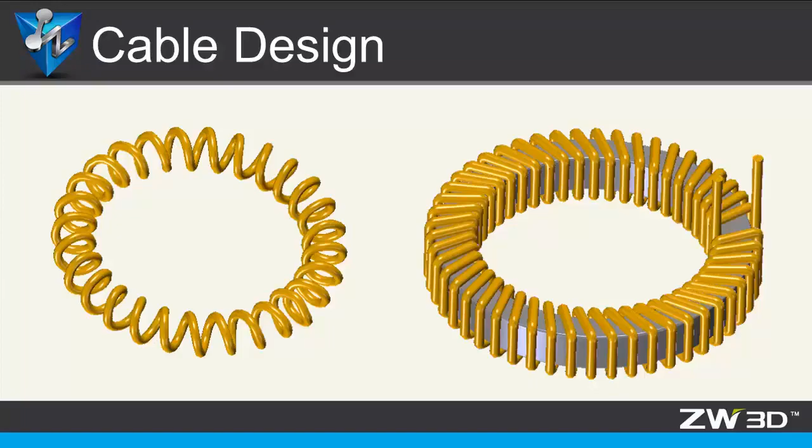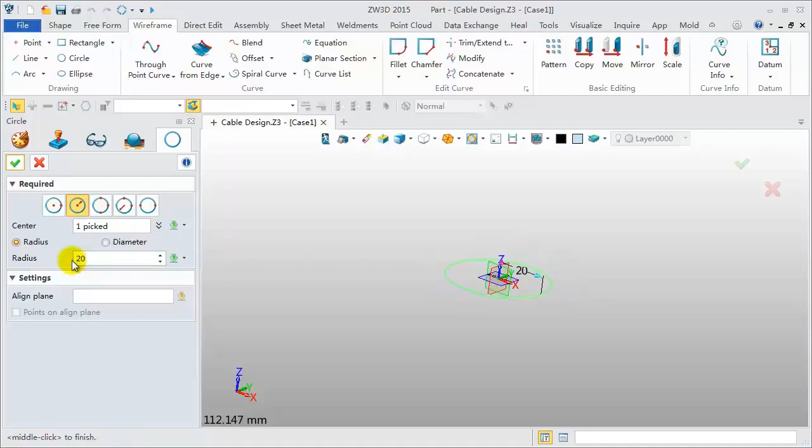Now, let's begin. Create a new file and name it Cable Design. Click the plus icon to create a new object. Name it Case 1. Click Wireframe, Circle. Pick the original point and set the radius to 20 millimeters. Click OK to finish.

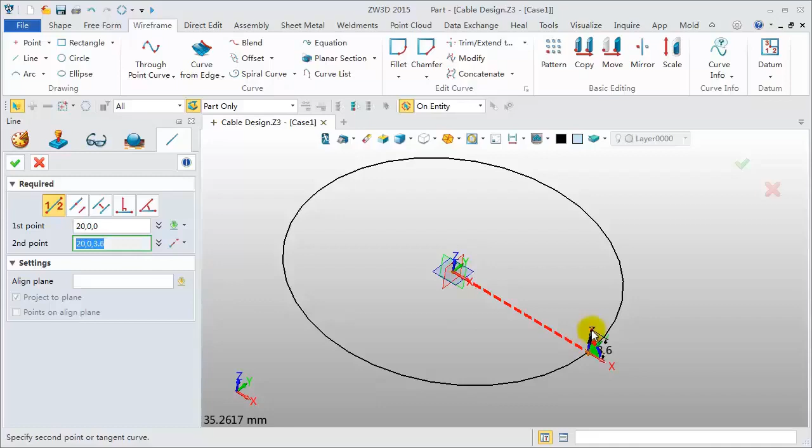Next, create a line. Hovering over the original point, move the mouse along the x-axis to the intersection. Continue to pick the second point. Distance is 3.6 millimeters.

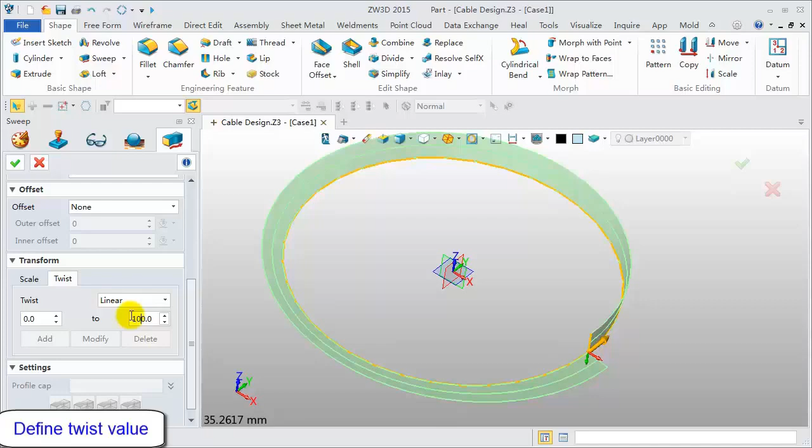Click the Sweep feature. Pick the line and the circle separately. Define the twist parameters. Linear change from 0 degrees to 10,000 degrees. This is the sweep result. Next, use Wireframe tool to extract the curve from the edge. Blank the sweep surface.

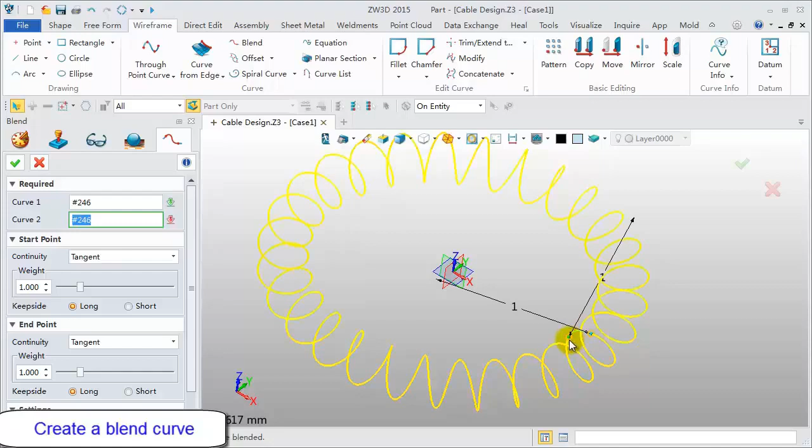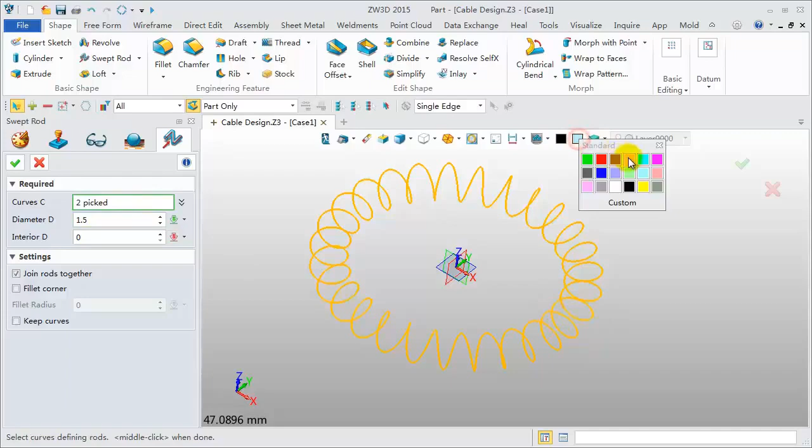Next, click Blend command to create a smooth connecting curve between the endpoints. Last, use Swept Rod feature to create shape. Pick curves. Diameter value is 1.5. Click OK to finish.

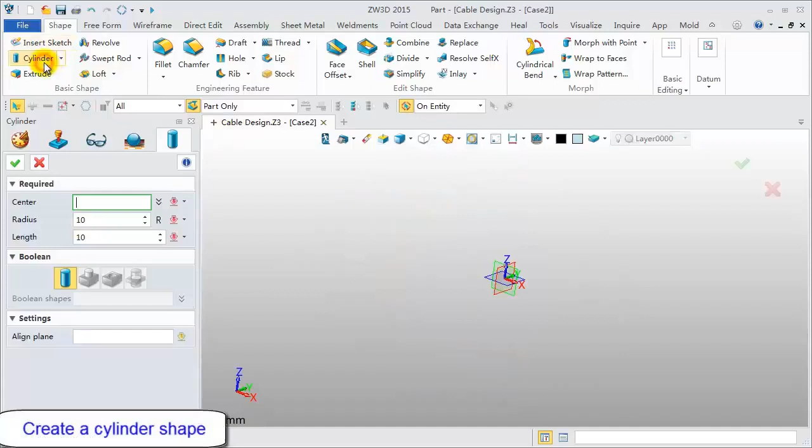Now, we will design another model. Click the plus icon to create a new object. Name it Case 2. Create a cylindrical shape, center located at the original point, radius 30, length 8.

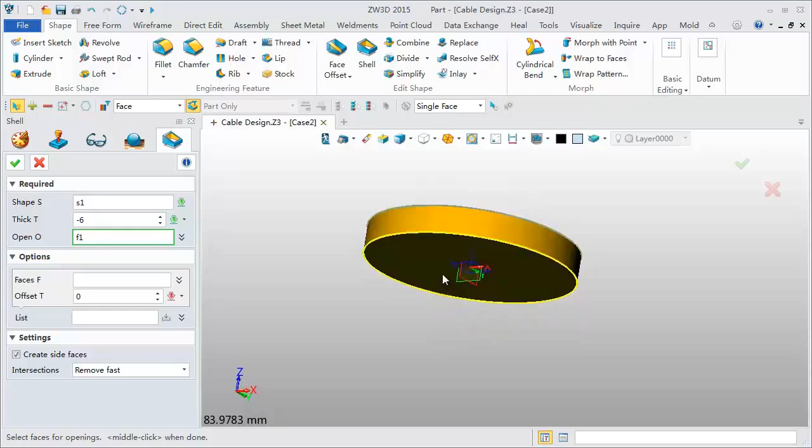Next, do a shell operation. Pick the cylinder, set the thick value to -6. Pick the top face and bottom face as open, and click OK.

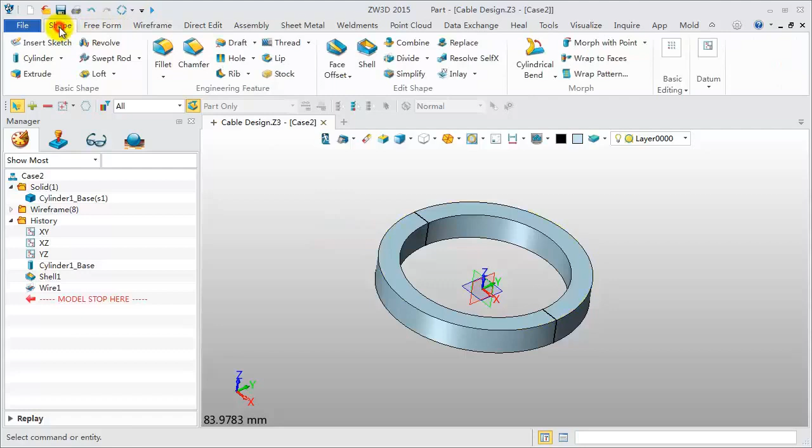Then, we will create the section line. Pick the InterX Curve feature. Select the shape and XZ datum. Get the intersection curve. Add fillet on the shape. Pick all edges and set the fillet value to 1 millimeter.

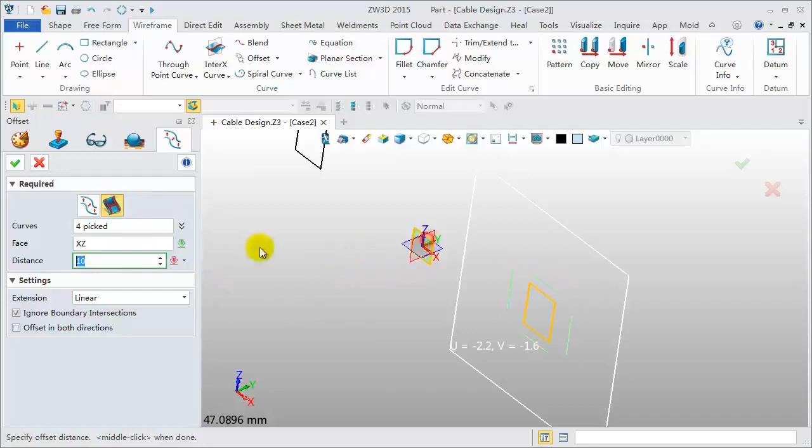Blank the shape. In the following, we will edit these section lines. Click Wireframe, Offset command, Offset on face. Pick these 4 lines in the XZ datum. Offset distance -1. Click OK. Blank the original lines.

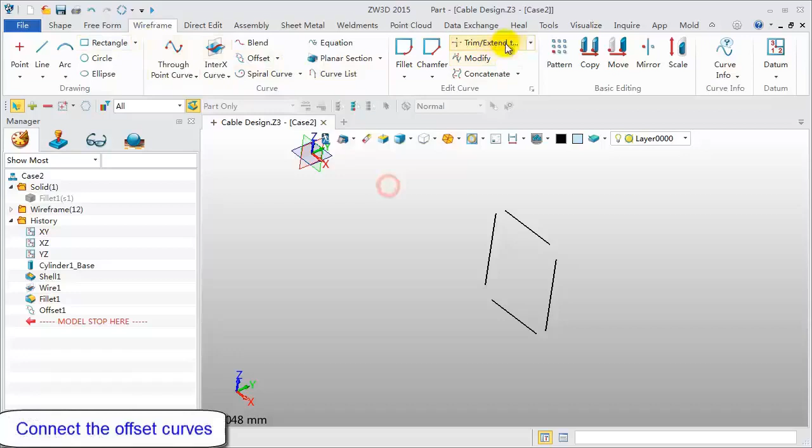Now connect the offset curves with the Extend to Corner tool. Pick 2 adjacent lines. Middle click. Repeat the operation with middle click again.

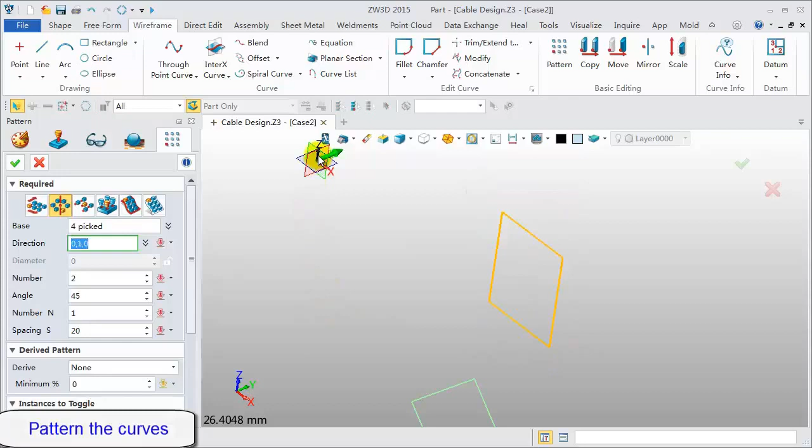Next, make a circular pattern. Pick curves, Z-axis, number 2, angle 7.2 degrees. Click the Line command. Pick 2 points to make a connecting line.

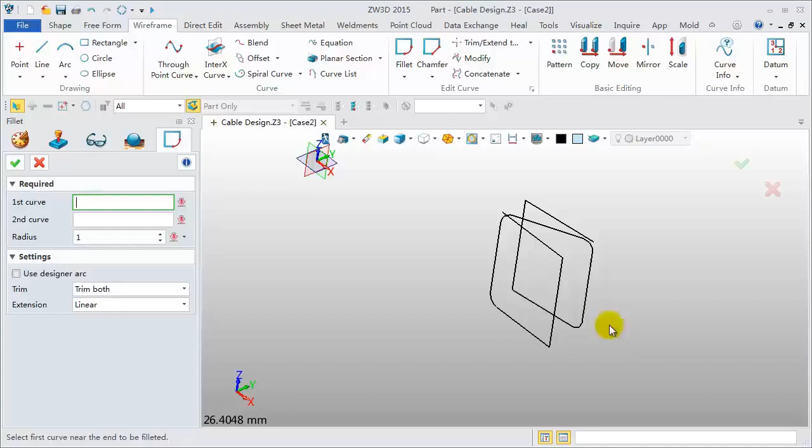Then add the fillet. Radius 1 millimeter. Do them one by one. Middle click. Repeat the operation with middle click again. Delete some of the unneeded curves.

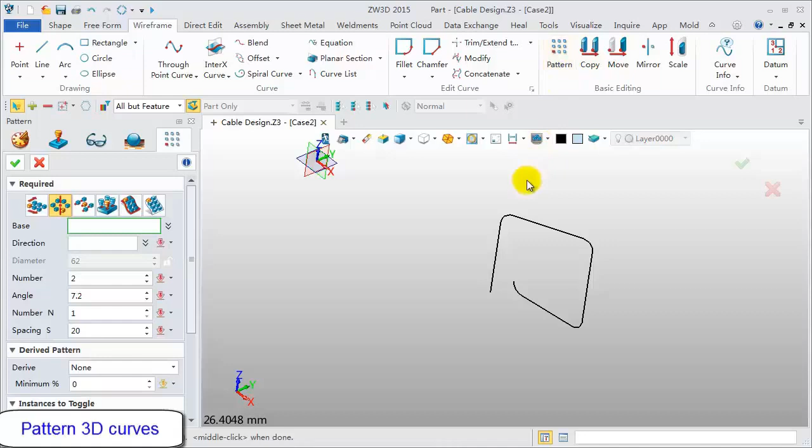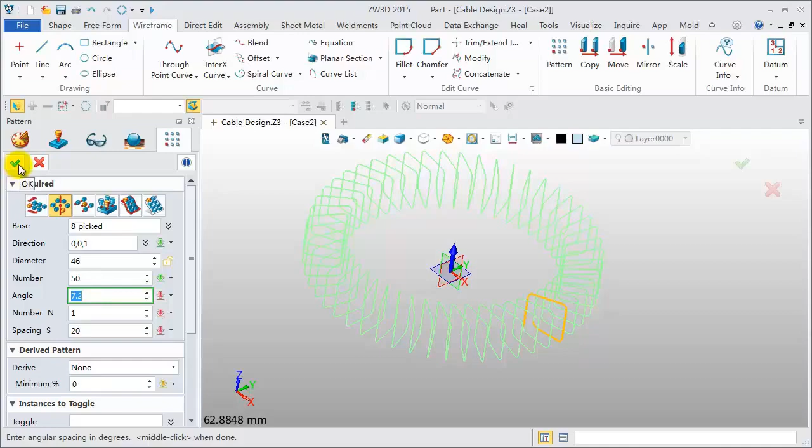Then pattern these 3D curves. Circle pattern. Pick all curves. Select Z-axis, number 50, angle 7.2 degrees. Our desired model is open cable. So delete some of the unnecessary curves.

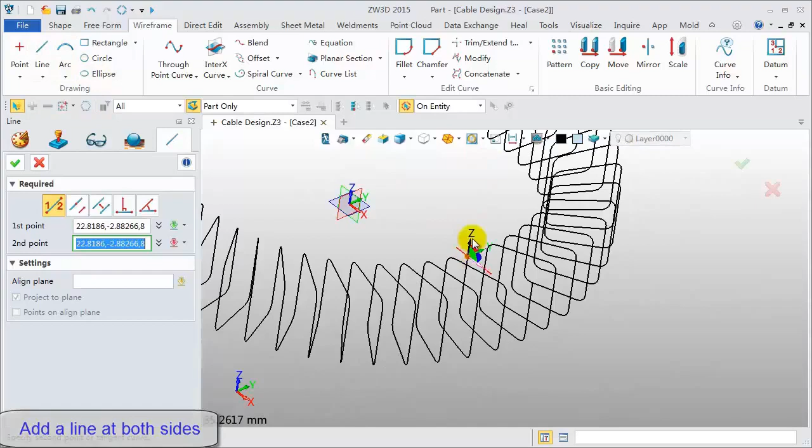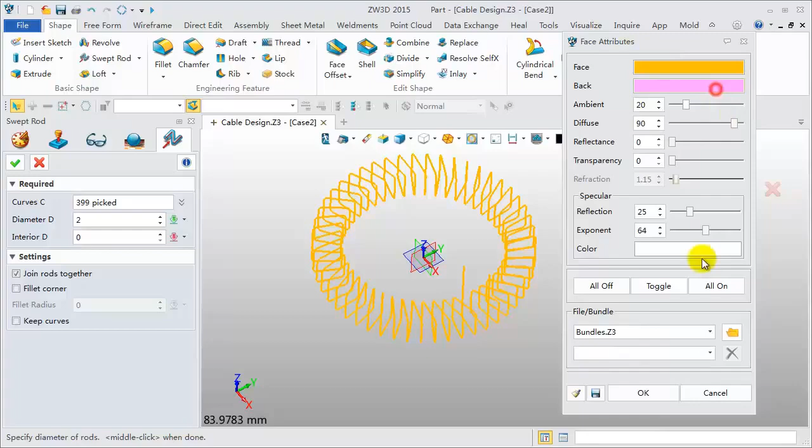Then add a line at both sides. Any length is okay. Click Sweep Rod. Pick all curves, diameter 2 millimeters. Assign a different face color. Click OK to be done.

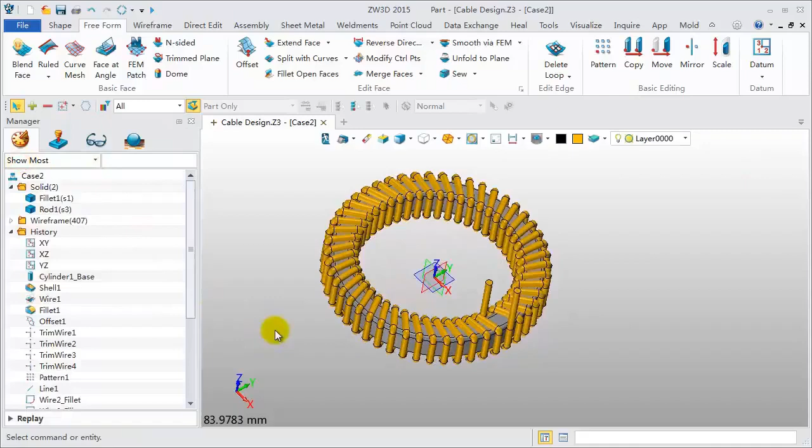Last, sew all surfaces together. Unblank all. Right-click on the first shape. Click Face Attribute to change the face color. OK? This is the final model. How about you? Try it out.